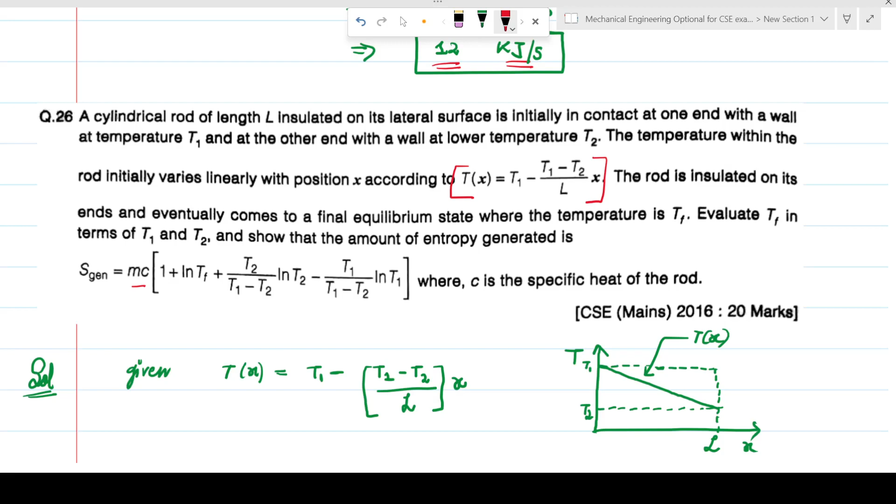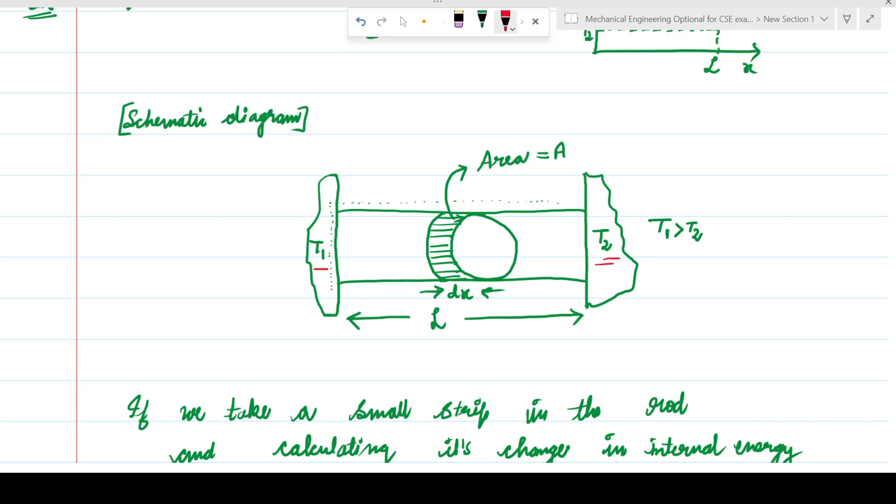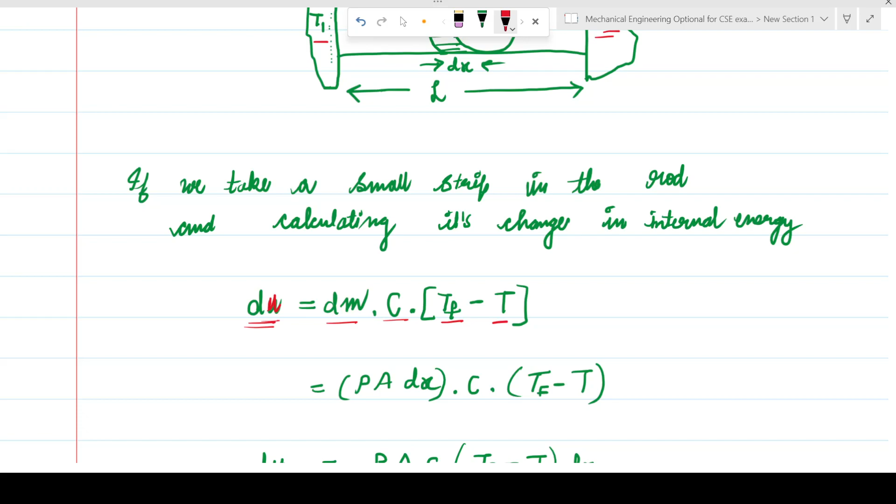So we have taken a small element dx of this whole rod and its area is A, and as given in the question T1 greater than T2. So I have written here that if we take a small strip in the rod and calculate its change in internal energy, so this is du, not dw, it is du. So du is equals to dm multiplied by c into Tf, that is final temperature, minus T, that is the initial temperature that is given.

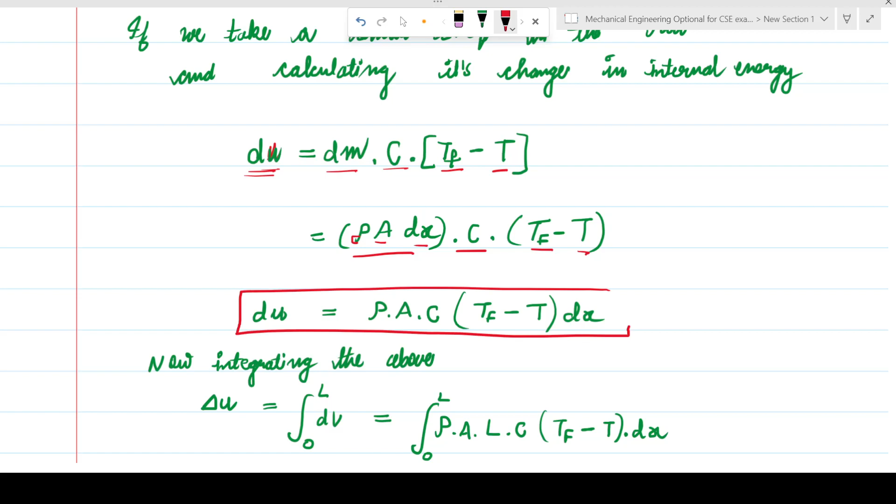So dm is equals to density multiplied by area into dx. So rho A dx multiplied by c into Tf minus T. So we get this expression of du, that is the change in the internal energy. Now if we integrate this expression for the whole length 0 to L, then we can get the change in internal energy for the whole rod.

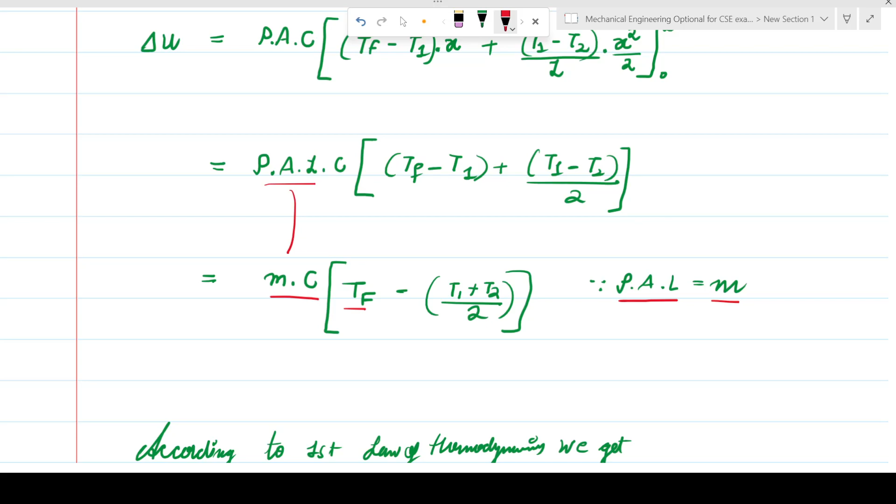So if we integrate this, we get delta U for whole rod as rho A L multiplied by c into Tf minus T1 plus T1 minus T2 divided by 2. So this comes out to be mc into Tf minus T1 plus T2 divided by 2. And as we know that rho A L is equals to m, so here we substitute m. Now according to the first law of thermodynamics, we know that the change in internal energy is

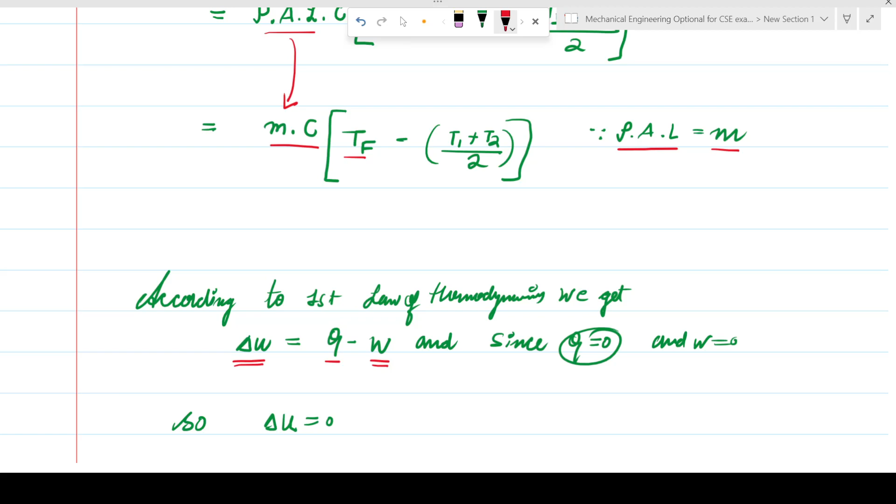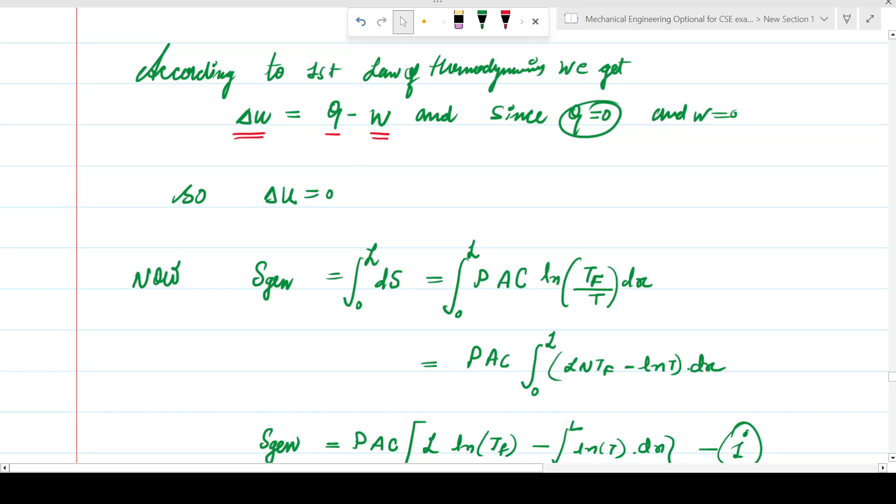equals to the heat supplied minus the work, that is work done by the system or done on the system. And we know that here it is a closed system and no heat transfer takes place and the work is also zero. So the change in internal energy for this system becomes zero. So in this question we have to calculate what is the entropy generated.

So we know that the entropy generated is given by integration from 0 to L of the small change in the entropy, that is ds. So here again we use the formula of the entropy, that is mcp ln T2 by T1, that is integration of dq by T, and dq is equals to mcp dT. Putting here the value of dq and integrating, we get mcp ln Tf by T. So this is actually not total change, but it is ds, the small change in the entropy.

And now we have to calculate this small change of entropy over whole of this length. So we calculate by integrating this expression, and the entropy that is generated is given by this. And we also know that the temperature of this rod is linearly dependent upon the length L. So in the expression of entropy generation S gen, we have to replace the value of T from this expression.

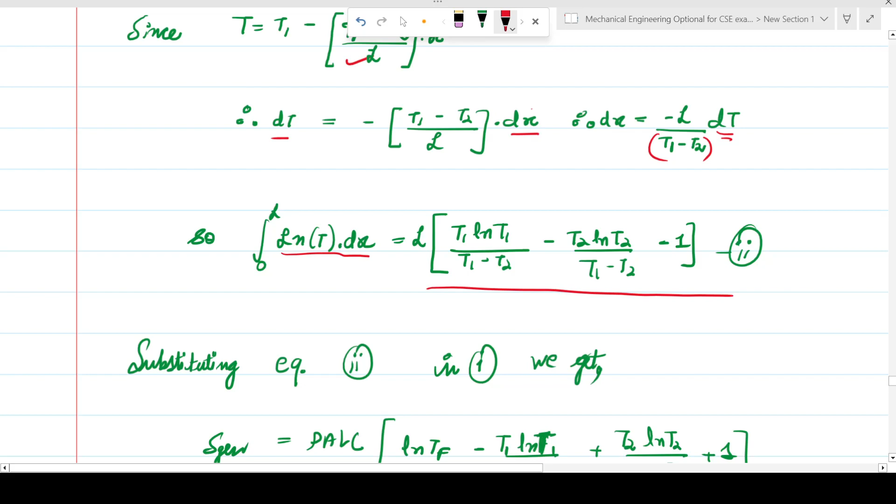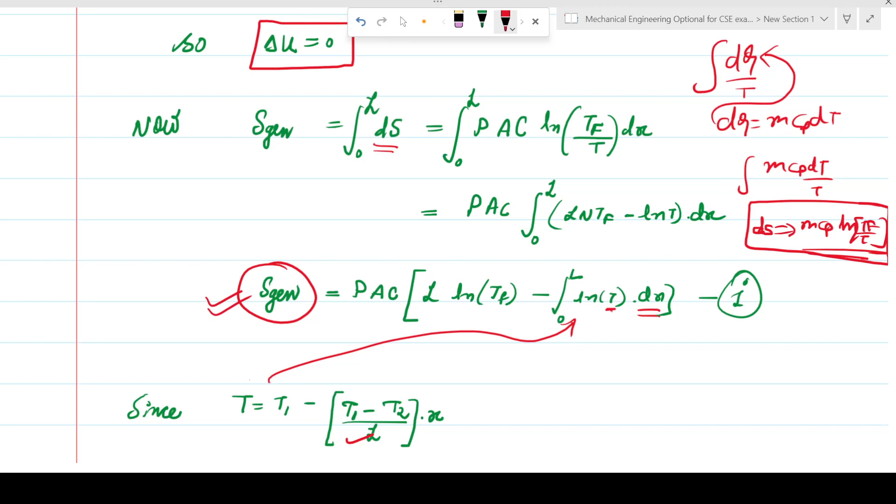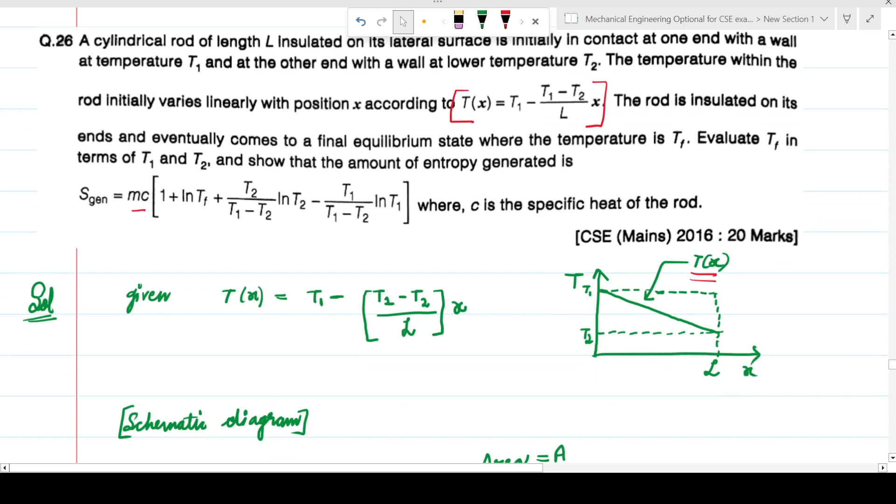And then if we substitute this big expression in the expression for S gen, the entropy generated over whole length L, we can get the expression that is demanded in the question. So this is the way we solve the question. It might look a very big question, but if we solve systematically, then we can easily solve it. So this was the solution for this question.